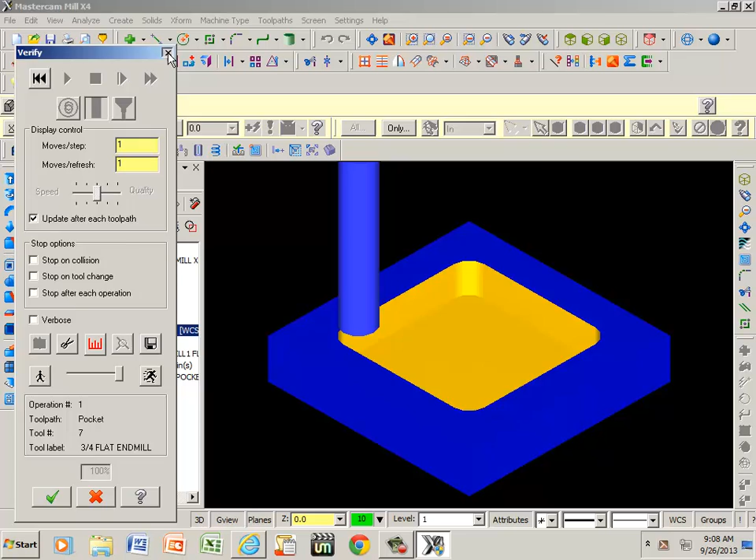Okay, we're back. This is going to be a continuation of the last video, lesson 1, Mastercam. Here's where we left off. Last thing we did was this pocket, and I can hit verification, and there's where we left off. If I needed to change something, I can always go back into parameters and make a change.

Let's say that, for example, I know I did not change my feed rates. It defaulted at 6.4176 for my feed rate. I can change that now to 30 inches a minute. Tab down to my plunge rate. Normally would go at half of that or at 15. Notice that we're at 139 surface feet per minute.

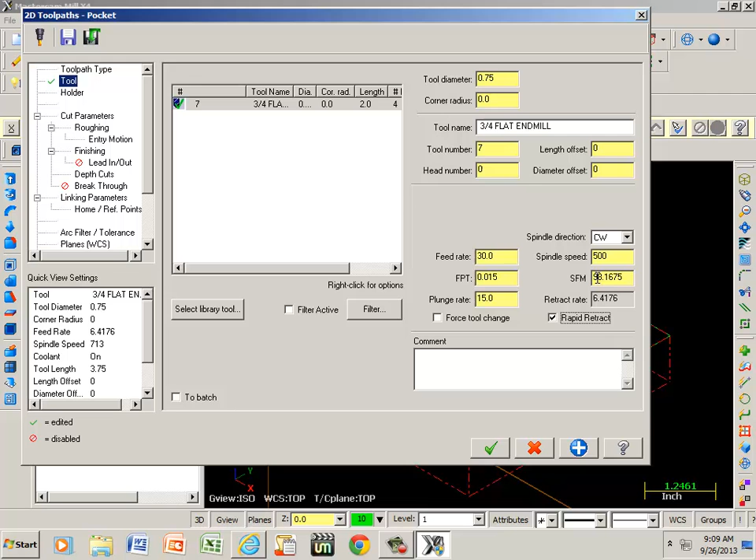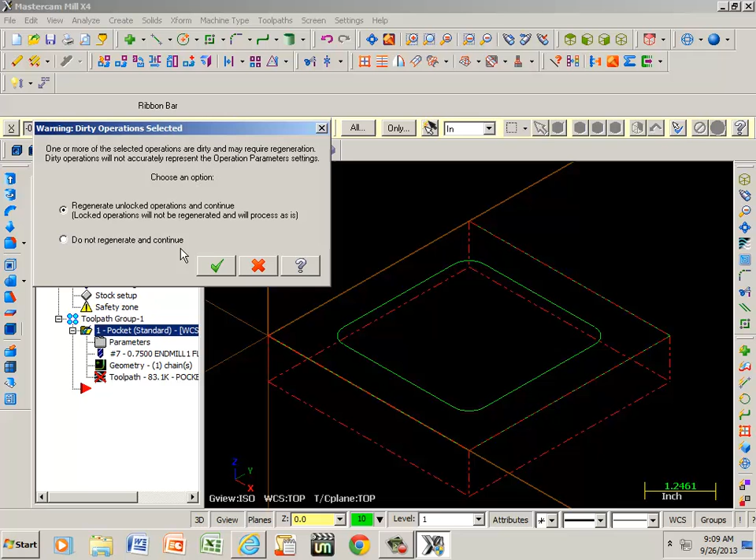I can change that by slowing my RPMs down to maybe 500 and click on rapid retract. Notice now that I'm right there at 100 surface feet per minute where I would like to be, 98, that's really close. And if I hit blue apply and green check, now notice I have a red X here. That's telling me that there was a change made. So if I click that, it tells me warning, dirty operations selected. Regenerate unlocked operations and continue. So if I hit that, it lets me change that.

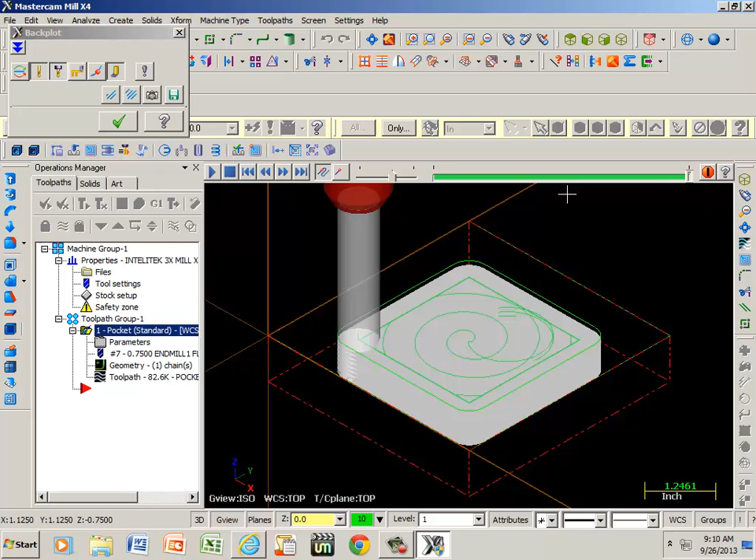I can watch this in a video format now on the back plot. It shows my actual tool positioning. Wrap it to the end. Done. Okay, exit out of that, and it made and saved the change for me. Let's go back to our top view. This time we're going to do something a little different. I'm going to create a contoured surface around the edge of this.

So I'm going to do the same thing I did earlier in the previous video by going to create line parallel. Last time I went 3/4 of an inch away from here, this surface to this surface. This time I'm going to go half of that, 3/8 of an inch. So if I uncheck this, type in 0.375, lock it in again, click this surface down to here, and work myself all the way around just like I did before. Blue apply, green check. Let's go back for the scissors, and I zoom in, start clicking what I do not want.

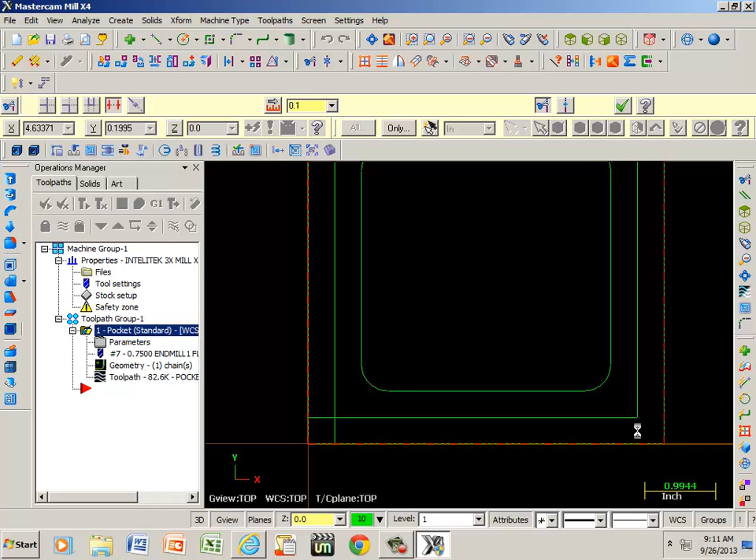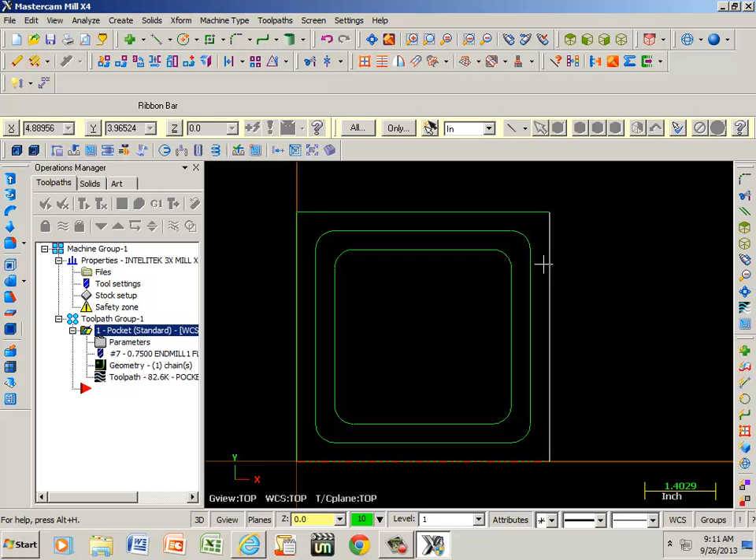There, green check. Okay, I had 3/8 radiuses here, so I'm going to keep the same thing. So if I go to fillet entities, it's still highlighted from the last operation. So if I click this line to this one, this to here, and work myself all the way around. Blue apply, green check. Now, let's go ahead and go to toolpaths and click on contour. Now if I click this line, turns yellow all the way around.

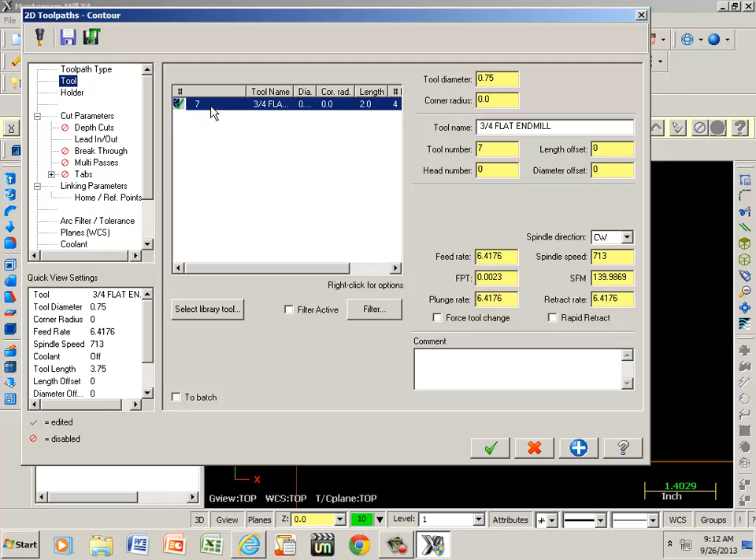Okay. Go to tools. I'm going to keep the same tool, this 3/4 inch cutter, but I have to specify it by clicking it one time and it turns it blue. Now it knows that we're going to use the same tool. Cut parameters. Now here's something a little bit different. It's showing my compensation to the left. Well, check this out. I started here and my tool is going to be here. So as I machine around this part, my tool will be to the right of this line here. My tool is going to be up in here somewhere.

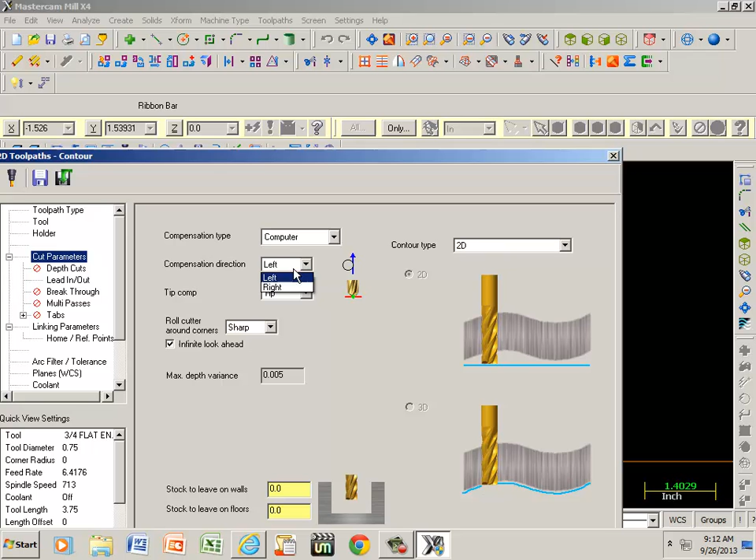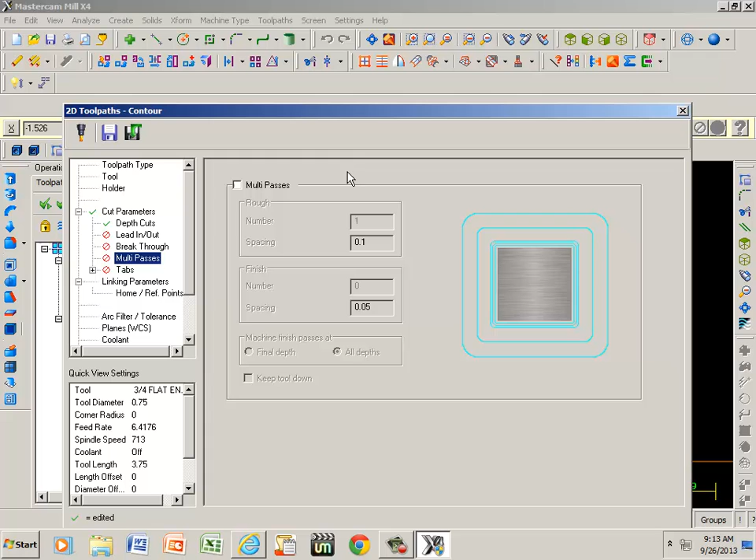So let's pull this back up, and I need to change my compensation direction. This is like your G41, G42. To the right, depth of cuts, click that. I'm going to take 50 thousandths per cut, 0.05. Leave lead in, lead out off again. And multi-passes, I think I can get away with that. I'm going to leave that unchecked for right now. Linking parameters, I'm going to go to a depth of -0.25. Again, I can turn coolant on if I want to or not. I just leave it off.

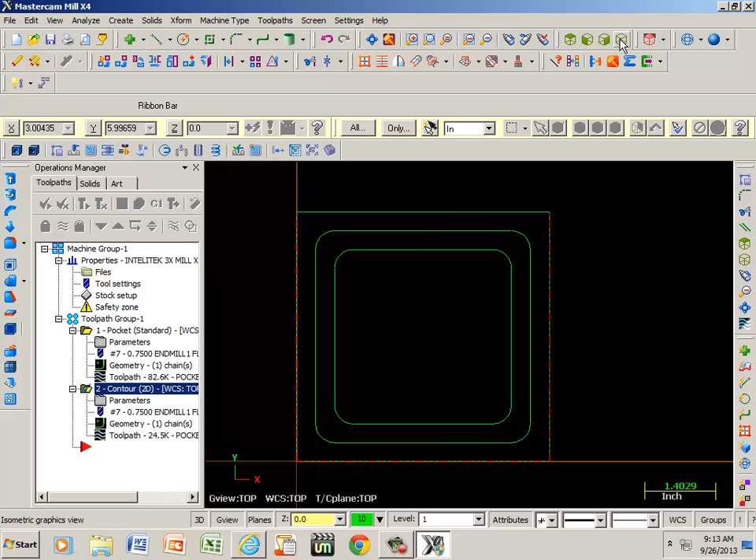Blue apply, green check. Now, right here is where my operations are. The last operation is checked, the first operation is not. So if I just want to see this last operation, I can go to isometric view and verify. Dynamic rotation, and everything come out good. Alright, now let's take a look at this again.

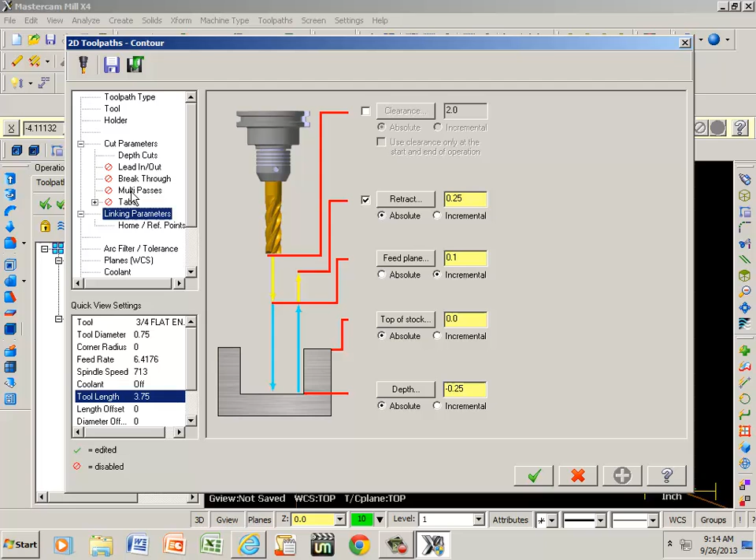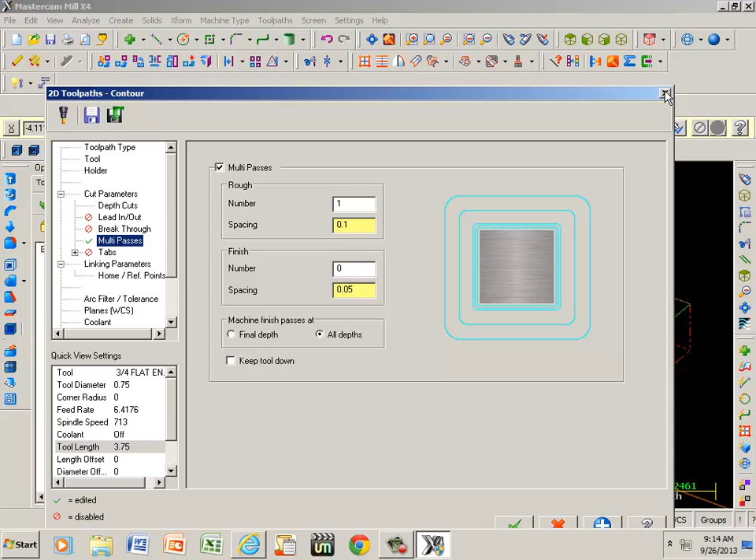Under my multi-passes, let's say that on this curve here I left a little bit of material. If I was using a smaller cutter or if it was wider up through here, then I could go to multi-passes and I could check that and say I want to go 2 passes and change my spacing to let's say a 1/2 inch or whatever, and it would take off the rest of that material that it did not cut off previously. Alright, everything looks good there. I'm just going to exit out of that, and let's go ahead and click here.

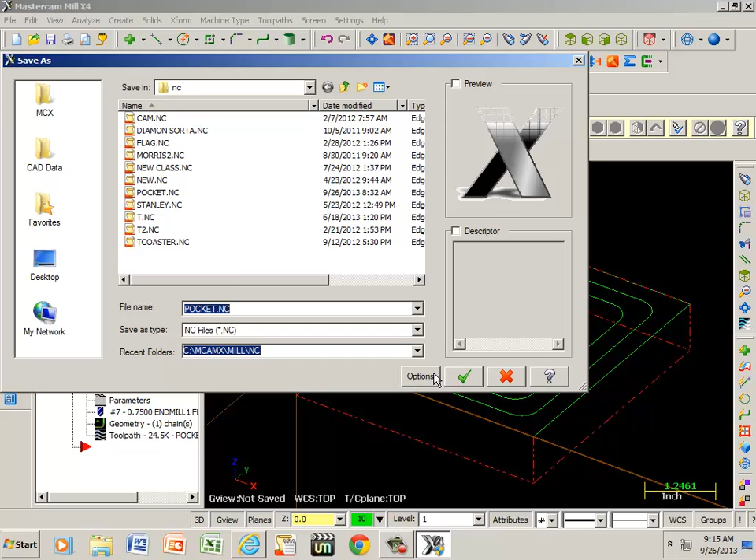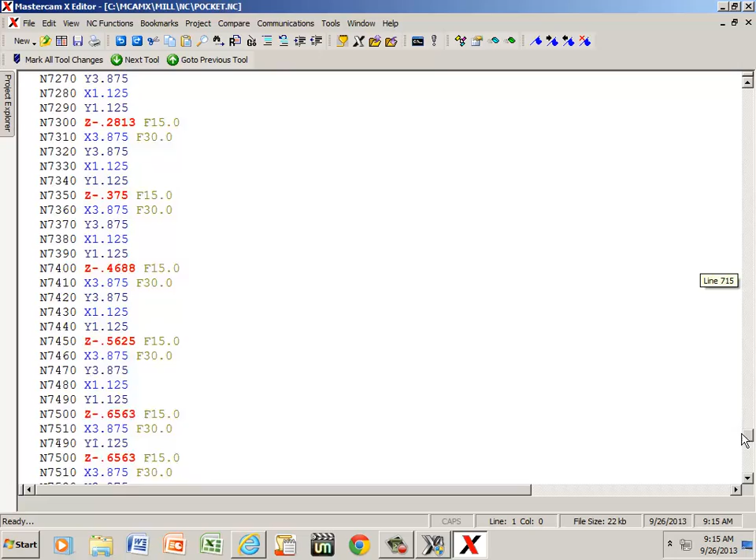This will select all my operations and go to verify, and there you have it, the entire part. Now I can go ahead and generate code, and I'm going to say pocket, and it's going to say it already exists. You want to replace it? Yes, because I did another operation. And there it is. A little longer. Alright. Well, that's it for right now. We'll come back and we'll drill some holes in here on my next video.